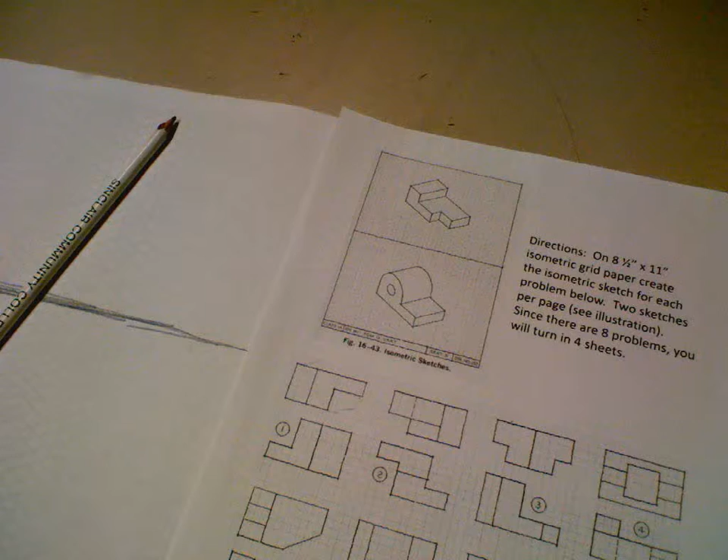Okay, this is the homework sheet for the isometric sketching. Make sure you print this out. This right here is exactly how you need to set it up.

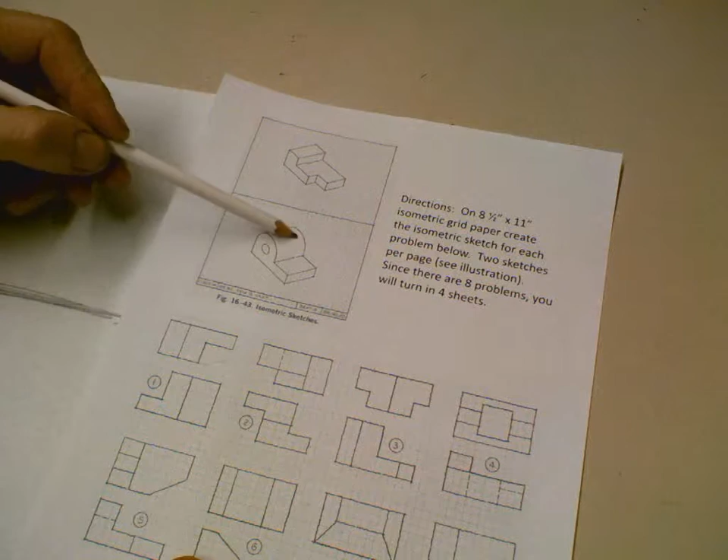You have your 8.5 by 11 paper. Just divide it down the middle. You'll draw one isometric in this half and one isometric in this half. So you have these 8 problems to do: 1, 2, 3, 4, 5, 6, 7, 8. If you put 2 per paper, then you'll turn in 4 sheets. Problems 1 through 8 on 4 sheets.

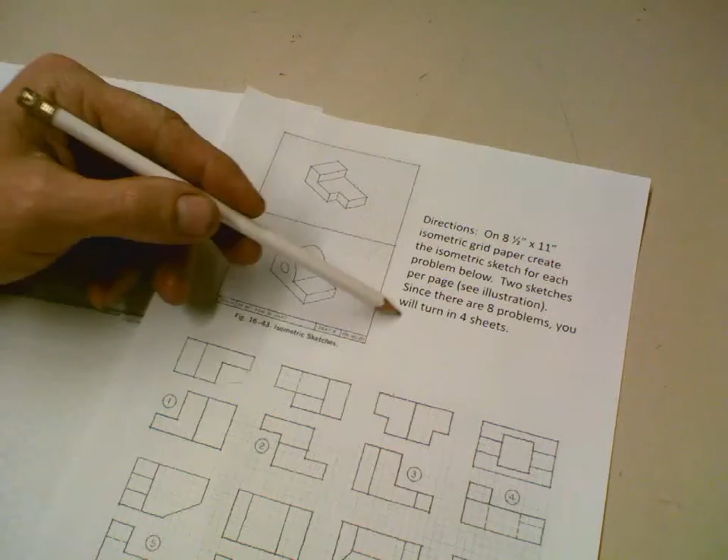Just like this directions right here tell you. So how do you set it up?

Like number 1, here's this grid paper that you can print off. It's too dark, and if you try to sketch on top of it, you wouldn't see your line. So what I use is an underlayment, and I put a white piece of paper over top, but I can still see the grid underneath. Therefore, you can just kind of follow the grid. You don't have to be on a grid as long as you're parallel to a grid.

If you're starting a problem, I usually, if we're going to be drawing in this direction, I'll start it somewhere down here, and then you can start sketching in your scaffold box of your object. Again, in these activities you don't have to count the grids. Just look at the object and try to make it proportional.

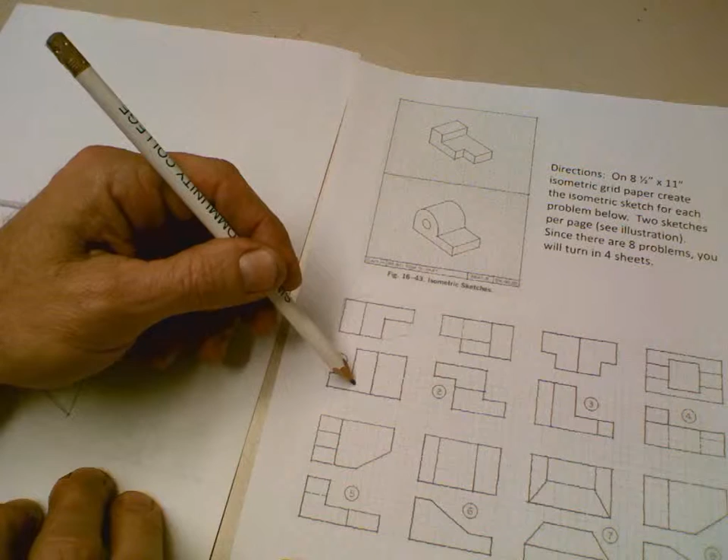So the depth, it's this deep. There's no right side view, just a top view and a front view. So they're limiting the views, so you have to kind of visualize a little better. So from these two orthographic views, you need to come up with an isometric over here.

If you want to, just proportionally sketch it in, and the length is a little longer than what we got here.

What I don't want... okay, that's a decent size right here. Kind of fills the paper a little bit.

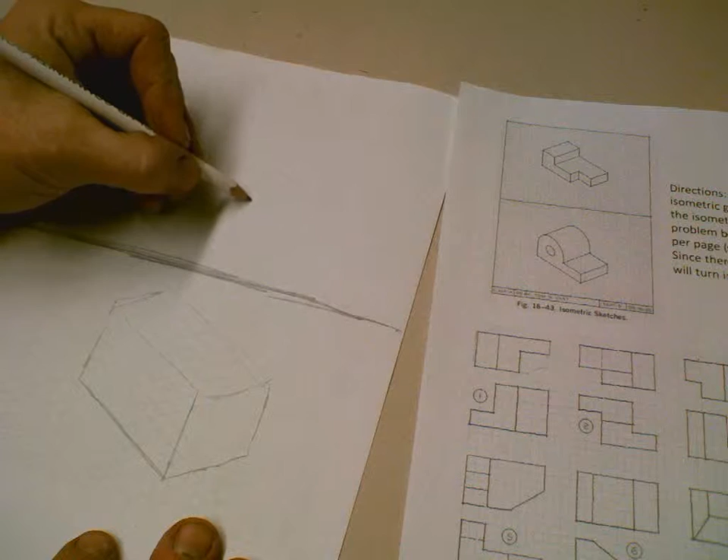What I don't want is something like this. This is my sketch, okay, that's way too small in the white space provided. Fill the white space as much as you can. I say this is about right.

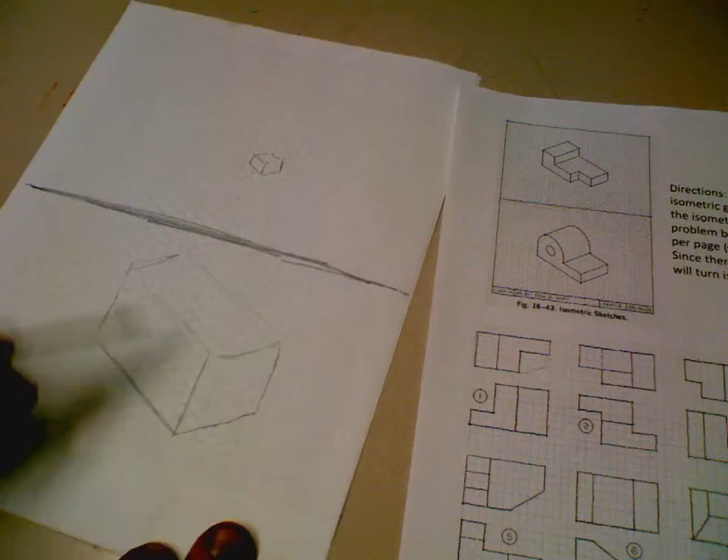If you find yourself going over the midline, if your back is out here, then you may have to start your corner down here a little lower. Then you can start adding in some of the detail, like this line here. It's not quite halfway, so it's probably like right in here, and it goes in like this.

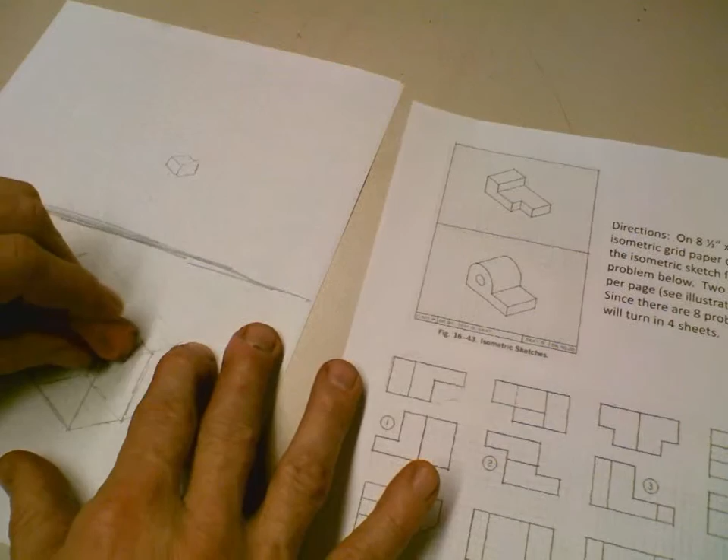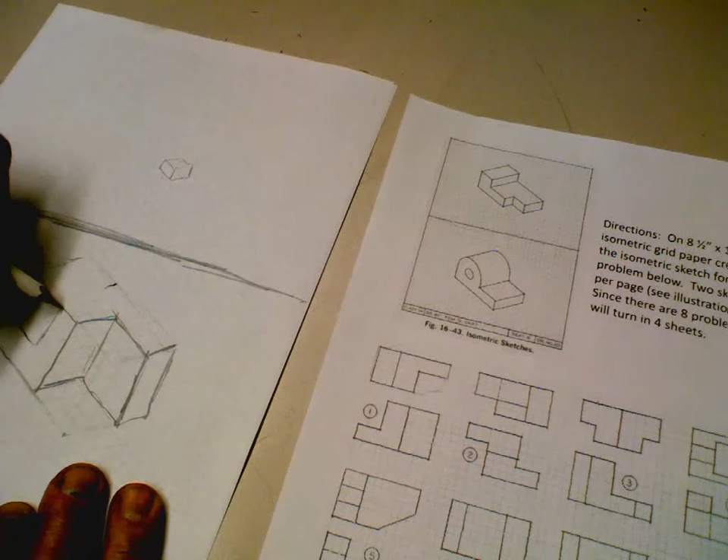Again, when you draw your scaffold box, make sure you draw it in light so you can erase. This goes all the way across. And this goes somewhere there.

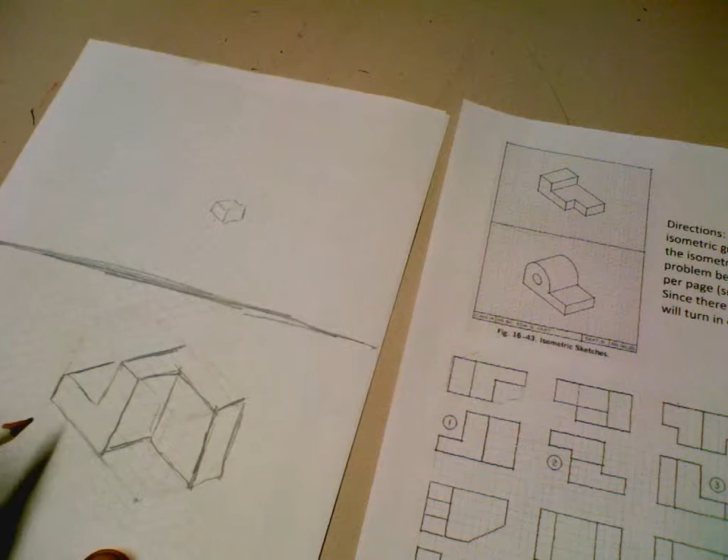Make sure you got a good eraser. So I'm not quite done yet. Get the lines darkened in. So that's kind of like number 1. Darken in. Okay, you got that surface. You got the L here. You got this here. So that's number 1.

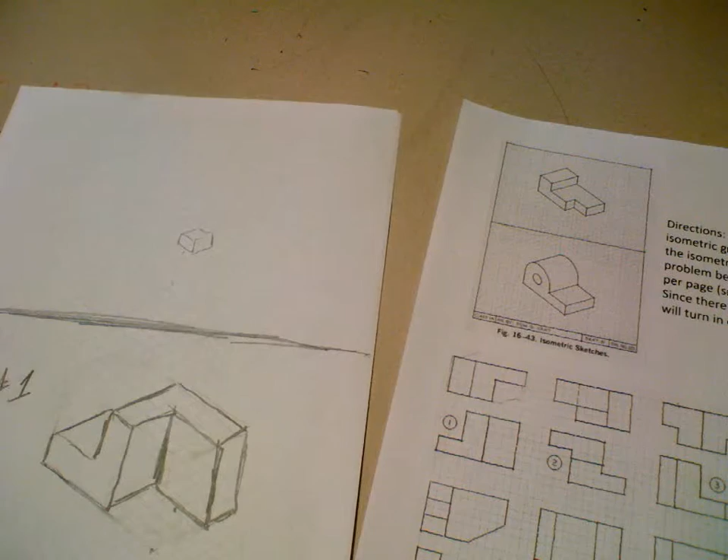Right there. Number 2 would go up here, but again, make it fill the white space as much as you can.